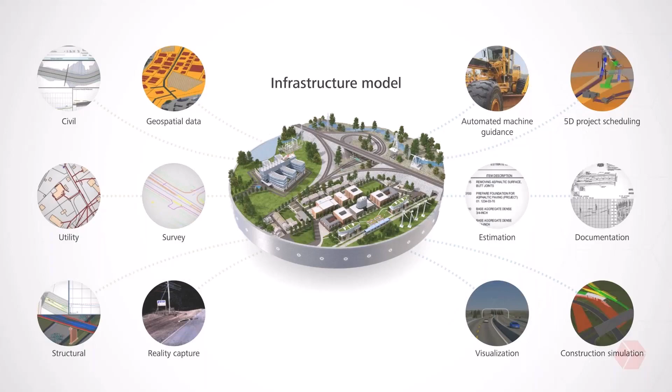So with that in mind, what are the actual advantages of conceptual design? If you didn't catch what I said, I have summarized it very quickly in point form. The biggest one is the reusable design data that you have. You have no silo effect, meaning if you do a conceptual design, you don't have to start again from zero when you reach the detailed engineering phase. You could simply import or link that data and continue your design.

The second one is intelligent design functionality from the get-go. You're going to see a little bit about it shortly, but if you can incorporate GIS, reality capture, cloud computation, watershed analysis, corridor optimization, all of this in a conceptual arena, you can also be much more economical, much more sustainable, and so on.

Parametric design is the way to go. It's dynamic. It's much easier to adjust the dimensions of elements, get the quantification correct, and it's much easier to pick up a mistake, especially if you're working in a 3D environment.

The visuals are really amazing. I mean, you can go up to like 4K, 8K now. You can do a lot of animations, a lot of fly-throughs, and it's really an amazing way to pitch your design and visualize it before it actually is constructed.

The integration is also a very big advantage where you can integrate the operability across different file formats, different technologies, different ways of working, systems. And you can see now the several options. You can do multiple options in one model.

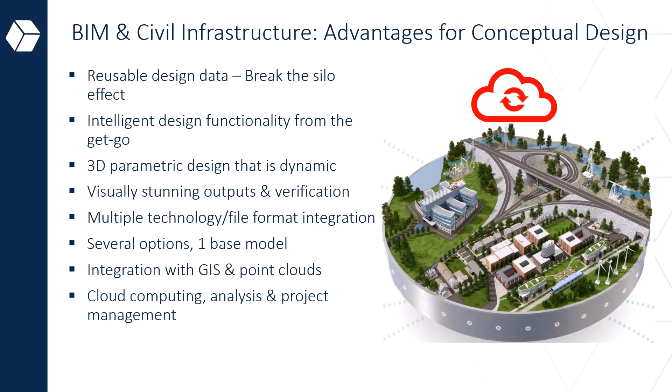And last but not least is definitely cloud computing, the integration of the cloud, the common data environment, the analysis that it gives you. It helps you and affords you with a lot of intelligence and computational analysis softwares.

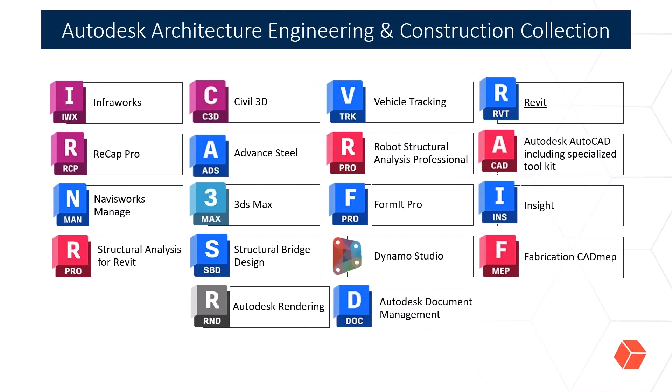So first of all, as you saw in the poll, over 40% don't know what Infraworks is, and maybe more people don't know how it actually fits in. Maybe you're using it on its own, but how does it fit into the grand scheme of things? I'm showing you here, it's part of the Autodesk Architecture, Engineering and Construction collection, so the AEC collection. And you'll see there it is.

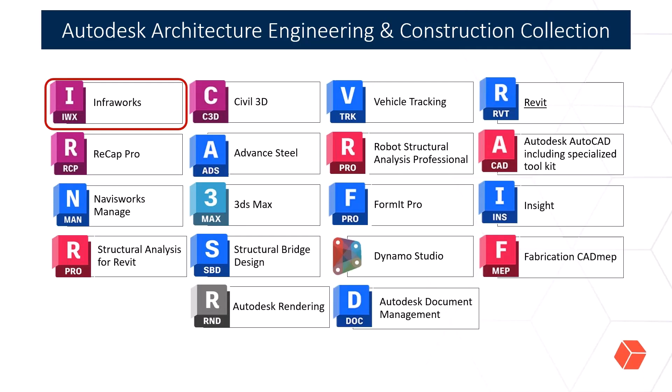Now the advantage with this bundle of software or BIM technologies, you can interlink them and collaborate across them quite seamlessly. And Infraworks fits in with the 2 main softwares, or the hero products in the infrastructure industry, that being Civil 3D and Revit. So how does it work? Right, let's have a look.

So here we have Infraworks. Now Infraworks can link to Civil 3D and Revit quite easily. If you're not familiar, in Civil 3D you have an Infraworks tab, believe it or not. A lot of people, especially when they come for training, have not noticed this. This has been out there for years, and you can actually import and launch Infraworks directly from Civil 3D. Of course, you will have to have it installed on your computer.

And then, of course, you've got Revit. Where does Revit fall in? From the civil structures workflow, if you're dealing with bridges and tunnels, or if you have any architectural designs, you can actually coordinate it between Civil 3D and Revit and get the positioning correct on Infraworks. So you can actually see the visual model between the 2.

Now, what about the rest of the AEC collection? I've just highlighted the main ones, but those are all of the BIM technologies that you can actually bring in to Infraworks. So Recap Pro from a point cloud perspective, RCP files, Navisworks, NWD files. Advance Steel is AutoCAD based, AutoCAD products, no problem. 3ds Max, FBX files, FormIt Pro.

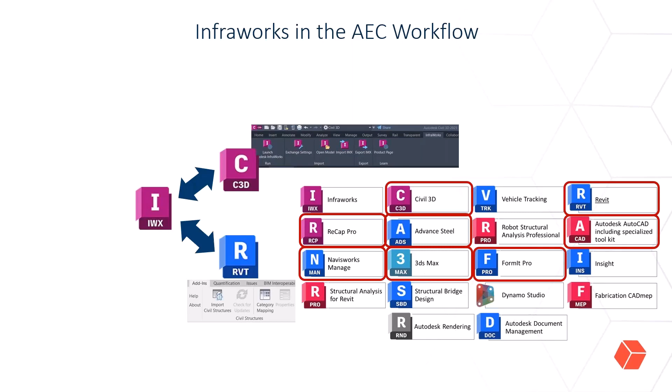Now, where do these technologies go? Pretty easy. If you open up Infraworks and you go to data sources, these are all of the file integrations that you can bring in. You can see it's quite a long list.

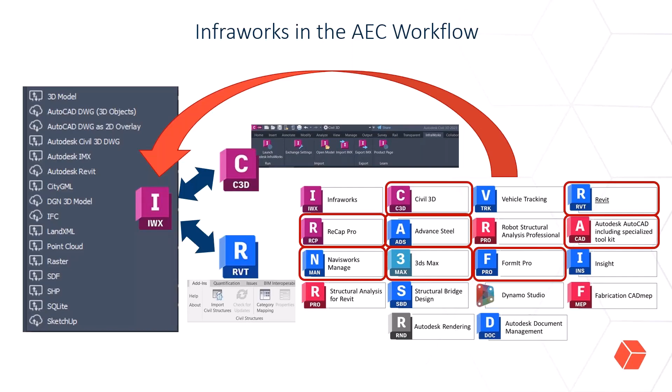SketchUp users, if you have really cool 3D models that you don't want to duplicate, you can bring in SketchUp files. SQLite, if you're working on SQL, depending on what data you have, you can bring that in. Land XML, raster, IFC, which is in line with the open BIM standards that's currently happening in industry, and so on. Okay, so now that you know where it fits in, let's get started with our showcase for today.

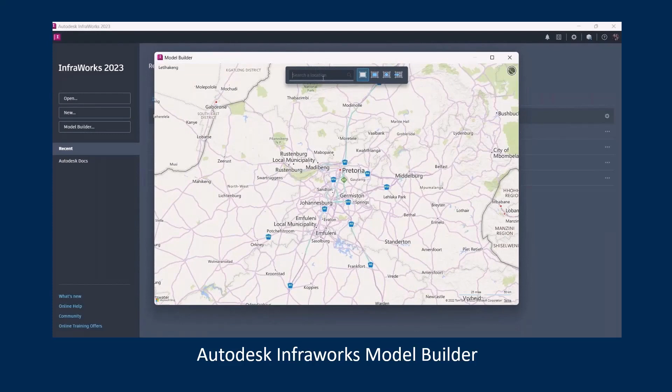But I know most users don't start on the cloud. So what we're going to do is work locally. And we're going to make use of the amazing feature called Model Builder in Infraworks. Now, when you do open it, it will probably pick up your location. Sometimes it might show America. So you can just type in the address that you want to work in. In this case, I'm using the Hartbeespoort Dam.

I have used this in quite a lot of my previous webinars because it's a really cool data set to actually demonstrate the point, and you can actually go and create your own, as you can see here. Now, it does have a cap on the model size, 200 square kilometers, which is quite a huge model. And of course, if you exceed it, it will give you a heads up.

So let's say I am quite happy with this extent of my model. I can now go and assign a coordinate system. Now, if you do get stuck, you can always click the help button, and it explains how you could go assign a coordinate system. By default, it is set to LL84, but we're going to change it to the South African coordinate system. So whichever country the project is in, you can go and select it from this list.

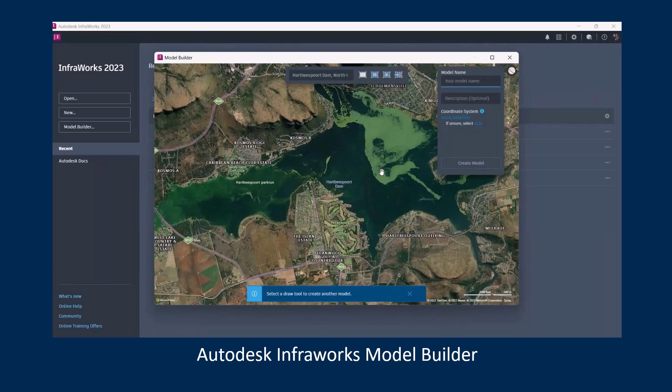In this case, it is based in South Africa, and we've got the Hartebeesthoek94 coordinate system, which is the current one, and it falls under LO27. And then we simply click Create Model, and the cloud does the rest. Now, this is the amazing cloud functionality that's part of BIM Technologies. So it will start processing it. Sometimes it might take a few minutes, depending on the size of the area and the infrastructure that it picks up.

This one probably took me about 6 minutes, and it'll give you a heads up. You'll receive an email to say your model's done, go and check it out. And you can see now when we come here, there it is. So it's called BIM for Smart Infrastructure. I'm given the option to work on the cloud or locally, and I'm going to select local. But I'm going to show you, once you work on your desktop or laptop, you can sync it to the cloud after that. So it's not a problem if you start locally.

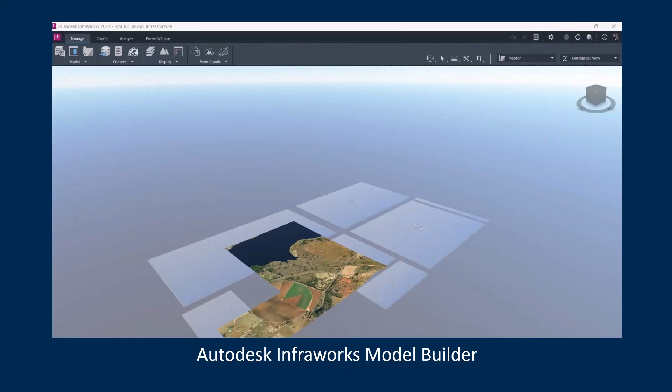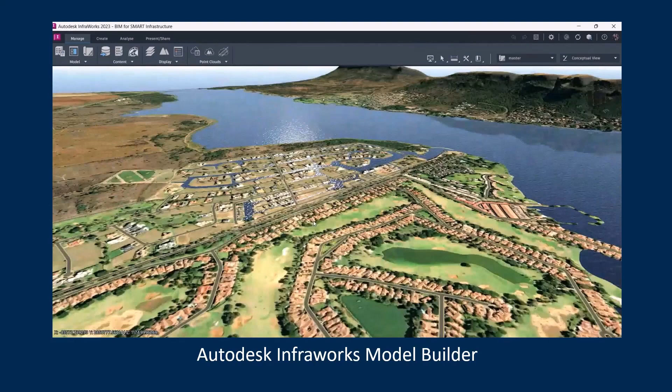So now it will start opening your model. Again, it can take a few minutes. This one took a few seconds. You might see these tiles appear, loading the extent of the aerial imagery and the data that it picks up on the web. And this is the result. You can see we've got a pretty decent sized model here. That is actually quite a big model, and it was done with, I would say, zero human intervention. All you have to do is specify the location and the coordinate system. And this is what it brought in.

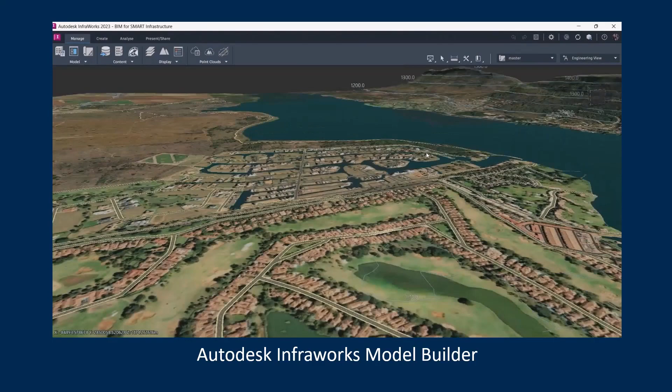As you can see, it brought in placeholders for roads. We call them planning roads. Those are not up to engineering standards, or they might be depending on the survey data that it brought in, but it gives you relative positioning. Now, if we look at the engineering view, it does give you conceptual terrain data. It will search its geospatial engines online and bring in terrain data that you can use to get started on your design, rather than waiting for the surveyor. And the more you zoom in, the more you'll see the contour spacing; it might reduce or increase depending on the level of zoom. And now we have our model and we can get started.

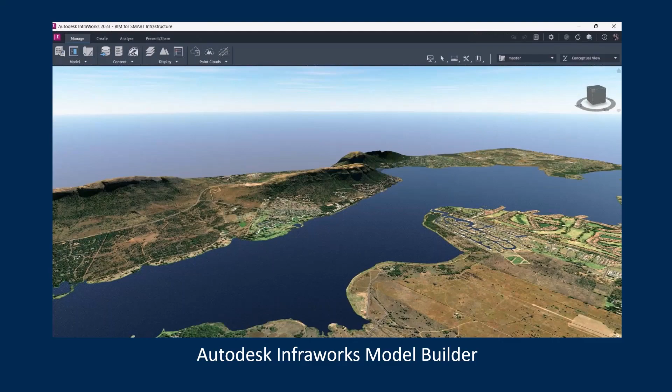Now just imagine how you would probably do this. You would normally go into Google Earth and draw a polyline if you're doing a road, get an elevation, take that snapshot and place it into your feasibility or conceptual report, but you can't use that data. Already, I've got a visual model that's 3D, it has terrain data, relative positioning, and aerial imagery. I'm already way ahead of the curve, and we're still in conceptual design. A lot of consultants, unfortunately, can't even get here during the detailed design phase, and we've got it in a few minutes.

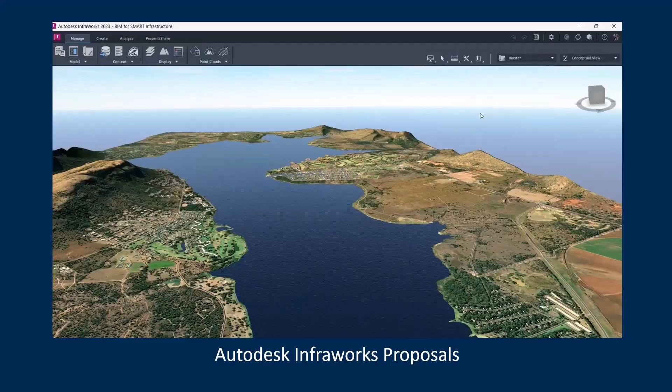So now that we have the model, how do we propose multiple options? Because I don't want to go and create this model again, even though it was quite easy. Can I use the same model to portray different design intents? Yes, we can. So let's have a look. On the top where you can see master, please do not work on that. That is your original base model.

And let's say in this case, we've got a project where we're going to be putting in 2 bridges. One is going to be at this location and one is going to be somewhere else. Now you can see I am adding a proposal. I'm going to call it option 1 for bridge, whatever you want to call it. Remember, there's no spaces in the title box, so you might have to use an underscore or one word. And I'm going to create a bookmark at this location.

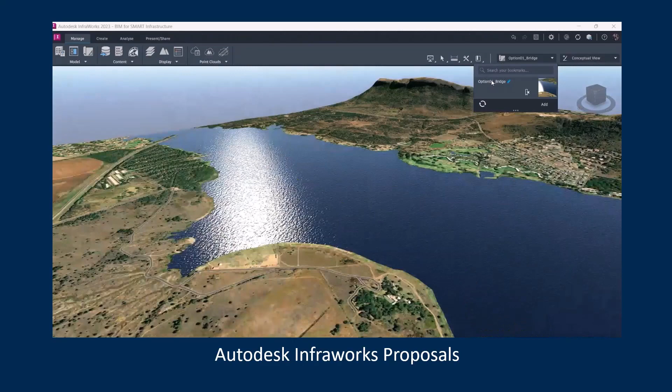So probably we as the engineers are sitting and thinking, okay, do we put a bridge here or do we put it on the other end? Now we can do both of those options in the same model, right? If you make a mistake, you can always delete a bookmark. It's pretty easy. So what is the advantage of a bookmark? Let's say you've got a huge model. If I click on the bookmark, it's going to take me right there, because otherwise you're going to be zooming and panning for a lot of time.

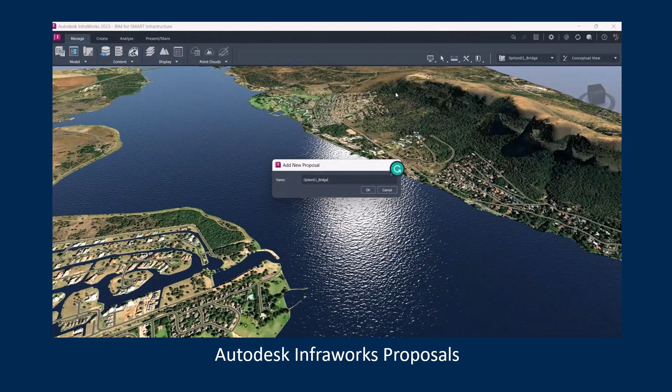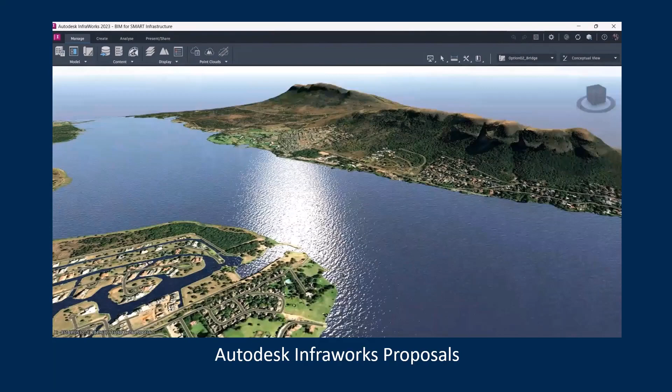Now let's say this location here is going to be for bridge 2. So all I'm going to do is add another proposal. I'm just going to change that to option 2. There we go. Hit OK, and now we are ready to go. So remember, create your proposals as many as you'd like. Do not work in your master model.

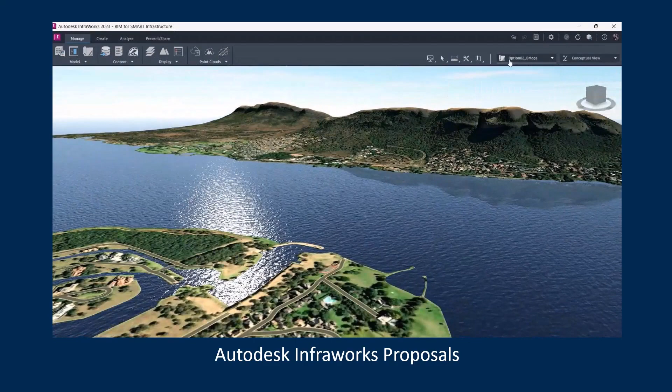I can't stress that enough, because whatever data you create in the master model is carried forward throughout your future proposals. And of course, if you duplicate from option 1, all the data that is in option 1 is going to come through. So here we are, we've got both the locations of our bridge sorted out, and I can add many more as the project goes along. So now we are all set to start with our conceptual design.

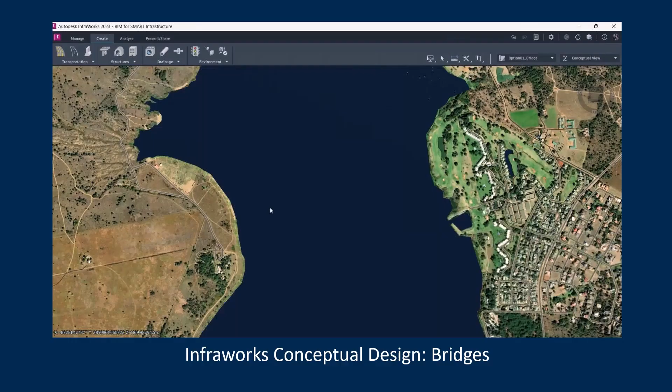If you are using Infraworks, what can you actually create from a civil infrastructure point of view? We can do roads, we can do structures, we can do pipes, we can do a lot more. I'm going to show you how to model roads, structures, and pipes very quickly. So let's start off with roads and bridges. Now, this is normally the complicated one, or is seen as a complicated area. So the first thing is we are in option 1, as you can see on the screen. Okay, so make sure you are in the correct place.

There we are. And let's say we're going to start and we're going to end somewhere there. Now you can have the exact X and Y coordinates. I'm just placing it in here. The pro tip that I would give you is to start off with planning roads. Why planning roads? Especially if you are new, it's much easier to draw. I prefer being in a plan view or on a top view. And there are a lot of built-in styles that we can use to generate the road. As you can see here, we've got quite a long list.

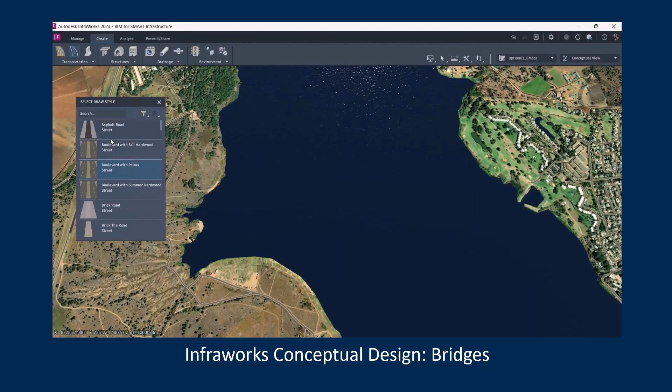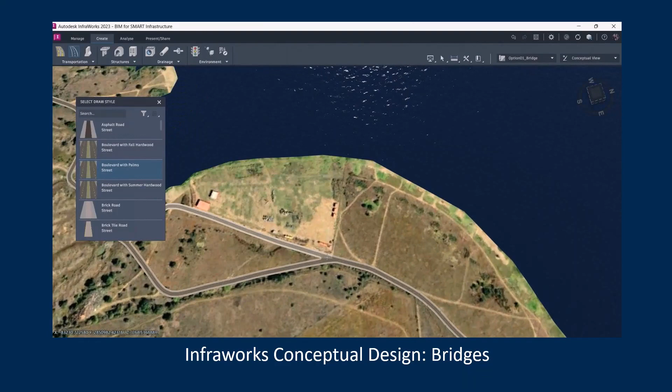Can you create your own custom styles? Of course you can. But the out-of-the-box ones are pretty neat to use, and you can also modify them later if there's a bit of additional stuff in there. So let's say I'm going to use the boulevard with palms street. That's the name of the style. Now all I've got to do is find my starting location. Now, I'm going to do something here intentionally because I've got this quite a bit in the past from users starting with Infraworks. As you can see, I started from that intersection point, that T-junction there.

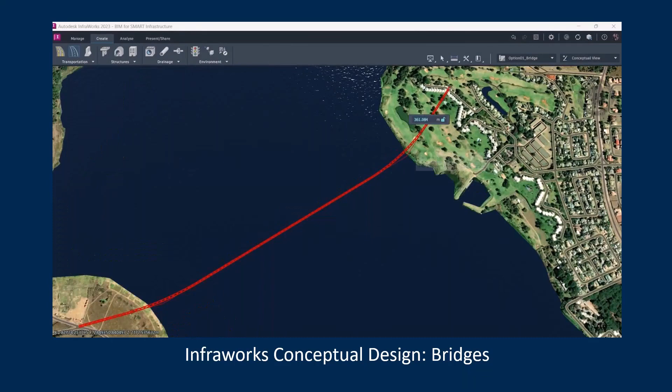And now all I'm going to do is start plotting my road. Now you can see with the planning road, it's much easier to just draft your road. Okay, so I would strongly recommend, if you are starting off, start using the planning roads if you are new with Infraworks. And let's say we are going to end maybe somewhere there. Okay, so we're going to reach the end. And once we do that, it will start processing and update based on the style that we had selected, that being boulevard with palms. And if I close this now, we can go have a look at what was generated.

So as you can see, we've got a 4-lane road. It's split with a median, 2 lanes in either direction. But this is what we normally get. You can see the intersection's not looking great. Please don't design stuff like this. But I'll tell you why that happens.

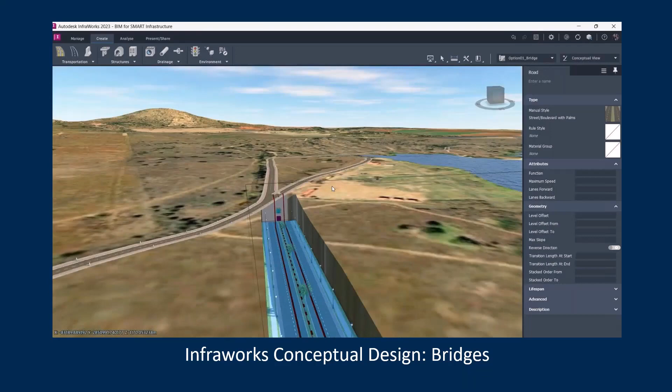So I've done it intentionally. If you look at the lane widths that are coming in from both those roads, they're completely different to what's happening here. And the difference in widths are vast. That's why you're getting something like that.

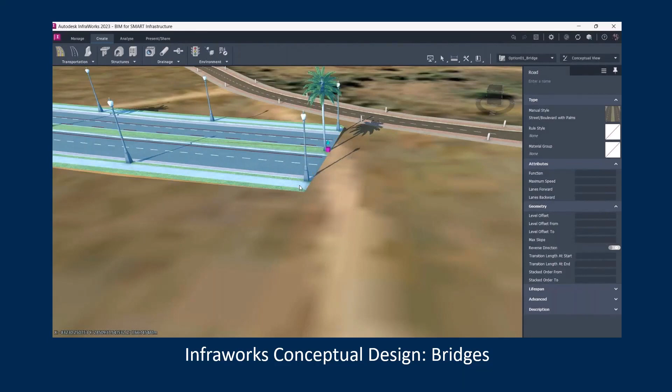Also, if your road sinks in like this, please zoom in because there are 2 grips. The triangular grip is for the elevation and the square grip is for your horizontal placement. A lot of people select the triangular grip and that's why your road falls. Right, so you can see if I adjust that, I can either type in the exact Z elevation or move it. What I'm going to do is I'm going to drape it to the existing natural ground level.

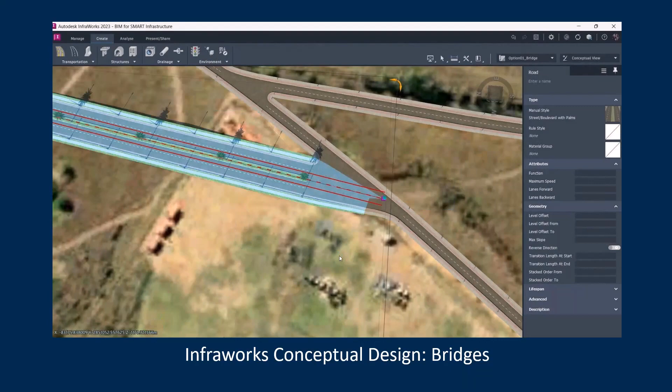Right, so once we have that, how would the intersection look? So if I select the square grip, now Infraworks is so intelligent that as soon as it picks up the 2 alignments are intersecting, it will put in a best guess intersection. Now in this case, the guess wasn't that great, or it actually was, but the lane widths of the corresponding roads are not that great. But you can see if I move it here, it says, okay, now that I've just got a straight to tie in, I can fit it in quite nicely. I can maintain the width of that road and I can fit it in here.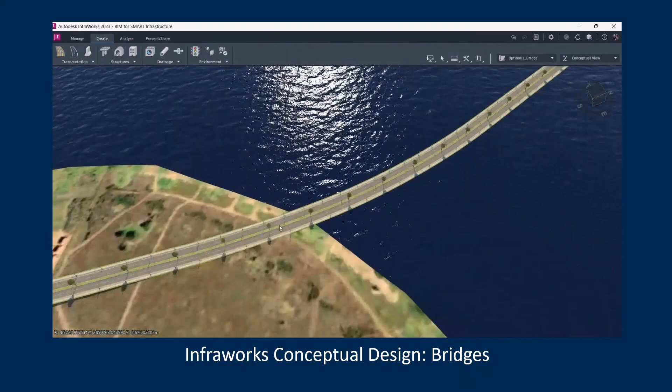Can I modify this? Of course I can. Not yet, because it's currently in the planning stage of a road. So planning roads are very easy. If you're the person who just wants to put together a quick mock-up or a quick type of scenario that you would like to illustrate, planning roads are the easiest to go.

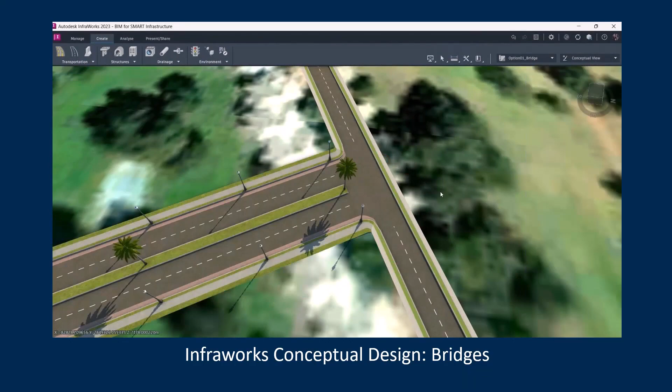And as you can see here, we've got the same story. But this story is different because you can see it's just a straight road, so it should be able to intersect correctly. All you have to do is just move your vertex and we'll play around with it so that it is intersecting correctly, and you can see it update. So now we have our road put into place.

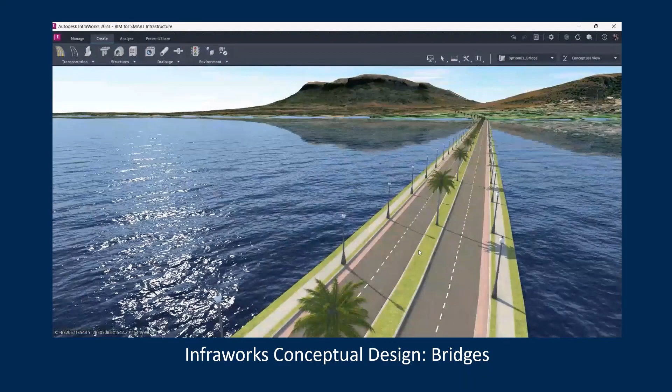You can see we can't really edit anything. We can change it, we can give it a name if we would like, but for now we're just going to leave it as it is, and it is just representing where the road is going to be, and we are now going to convert it to a component road. A component road allows you to edit individual components.

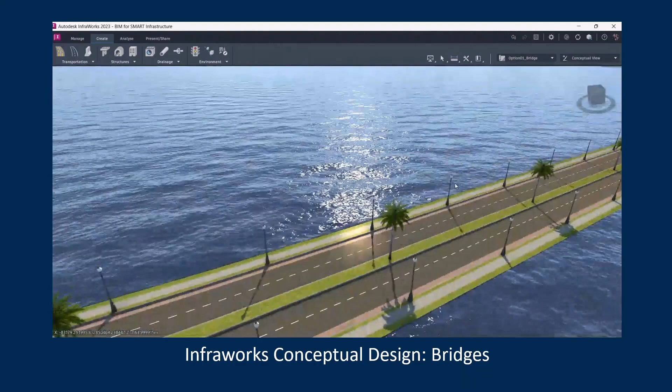So as you can see here, if I now select a lane, I can go and change its attributes, its width, its slope, its depth, and so on, the material, whatever it may be. So that's why we call it component roads, because you can edit components individually. Same with the trees. If I don't want the trees, I could delete them. If I wanted to adjust the spacing for them, I could. So let's say it's 60. You can see it's instant.

And of course, we can go and swap components. There's a huge library, a really nice library in Infraworks that you can make use of. And of course, you can import your own 3D models if you'd like. If you have access to them, you can go and import them, add them to your library, and you can make use of them. I'll just show you very quickly how you can swap things.

So let's say in South Africa, we normally don't have light poles like that. Maybe in the area that you're working, it's not that suitable. We can go and look at what's available in the out-of-the-box library. A great thing with this webinar is I'm using everything that's in your library. I don't have anything customized here. So whatever you're seeing on here, you can do it out of the box on your own computer.

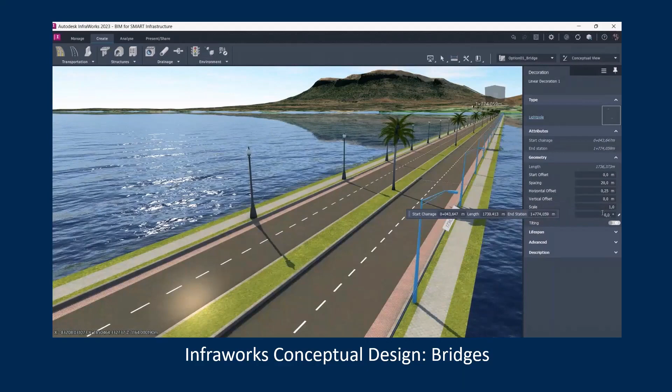So let's say we're going to go and select a light pole, and you can see that's more apt for our environment. If it is facing the wrong way, use the asset card to modify it accordingly. So I will just flip it around, and there we are. And I could go do it on the other side, and good to go. So that's a little bit about the road part.

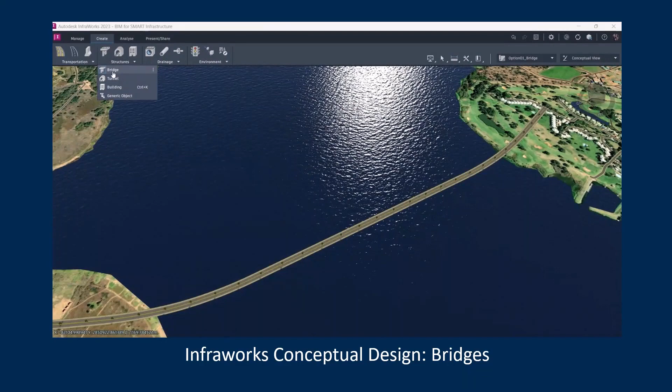So what we've done is we've got it to the component level of things, and now we're going to get a bit more detailed. So now we can insert the bridge. You've got the structure panel in Infraworks. All it's asking us to do now is to select or specify the start and the end of the bridge. You could type in an exact chainage, or you could simply click. Of course, I'm going to simply click here because I'm just demonstrating it to you. And let's say it's going to end maybe somewhere there.

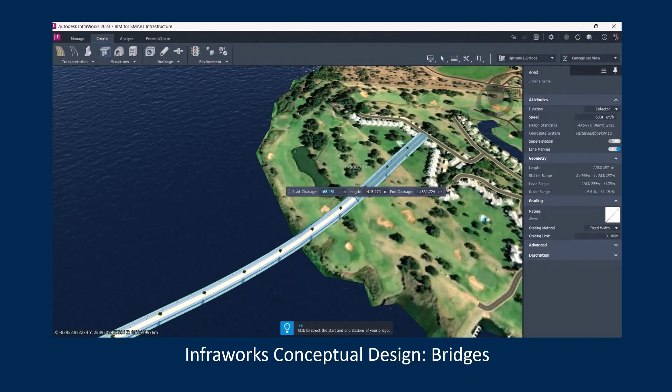Right, it'll take a few seconds to just refresh. As you can see, sometimes you might get this depending on the graphics on your computer or the size of your bridge or how full your disk space is. Sometimes you might just need to move around the model a little bit and select something and it goes back to normal display. And the great thing now is with component roads, I have a vertical alignment or a vertical profile. I can go and adjust this.

So let's say we're not seeing the piers and stuff because it's sitting on the road surface. I could simply play around with the VPIs and it will update. So I can go and raise it. In this example, I'm going to raise it quite a bit so that you can see the bridge quite nicely just for this demonstration. I've also got a yellow tracker to show me exactly where I am on my roadway. Okay, so that also helps.

So you can see the positions of the VPIs relative to where you are tracking on plan or on the top of the screen. And again, I'm just going to raise this so that you can actually notice the elevation of the bridge and also look at the parametric components that you will see shortly. Please do not make roads with 20% grades. But of course, you can go and edit it. Okay, so don't judge me. I'm just using the clicks very quickly just to give you an idea of how you could actually manipulate it to your own advantage. So you can go and type in exact data.

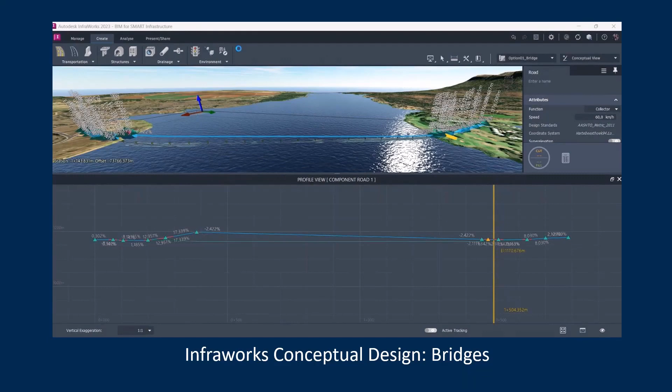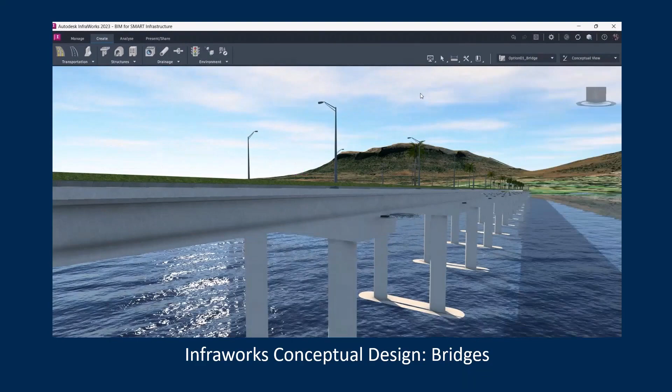But just remember, we're still in the conceptual stage here, and we have all of this, air quotes, detail engineering functionality already. So here we are. Once I hit update, here we go. We've got our bridge, looks beautiful. So if I select any of the components, let's just select maybe here. So this pier is pier 18. I can go and adjust the metadata that's associated to it, the material, and so on. And again, I've got my road.

You can see the start of that elevation. That kink is not great. I've done that intentionally, to show you that you use 3D modeling to confirm your design. If you do make a mistake, you can actually see it quite easily. We've got our bridge in, done and dusted. Now let's look at doing the second bridge.

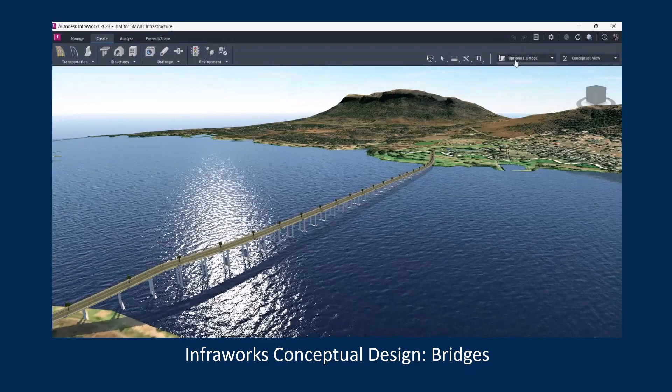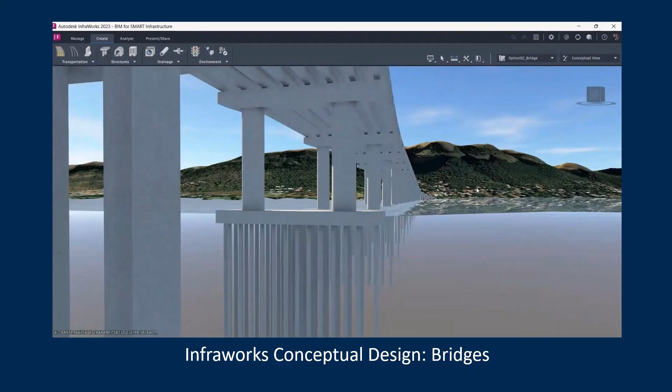So option 2, if I switch on there, it will take me to the location. You can see there's nothing there. And if I switch back to option 1, it's not there. Why? Because it is not part of this proposal. Now you can see in option 2, I already dropped in a bridge. You can see it's got a different design. It's got guardrails. It's got the lighting in the center. It's got the pile caps at the bottom and so on.

So that's what I'm saying. It is the same model. We just got different options. If I switch back to option 1, you will see that option 1 does not have that bridge. You can see I'm in the same location. And if I go back to the option 2 bridge, it is there. Can you combine them over time? Of course you can. But that gives you an idea of how you can segment your design. Okay, so roads and bridges done and dusted. Let's look at intersections and roundabouts very quickly.

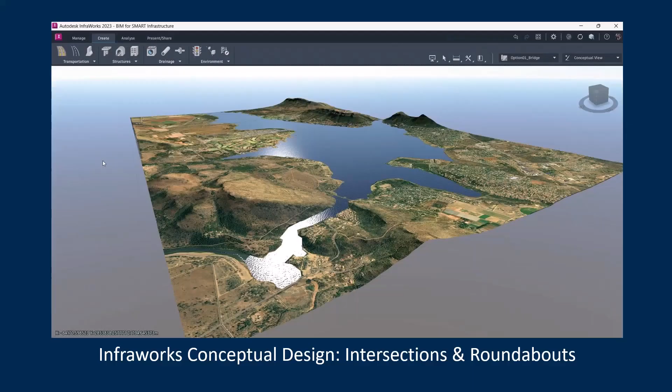So I've just drawn in a few roads. I've actually created a bookmark for it called roads. Here we go. And let's say we're going to go plot in some roads. I'm going to use the planning road type of scenario. You can go and select whatever style you want. I'm just going to keep it kind of uniform. We can simply just go and plot the type of roads. Now I'm just clicking wildly here, just for demonstration purposes. So you can see I've got my straight road done and dusted quite easily.

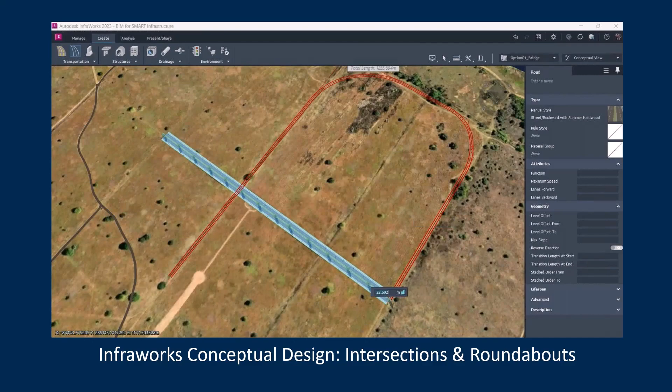And if I had to go and drop in maybe another road, I'm going to go there and I'm going to continue clicking. I'll just maybe use the outline of the existing dirt tracks on here just to give me a bit of a guide. But let's maybe create like a loop going across. This will just give you an idea of how easy this is. So we drop in the road.

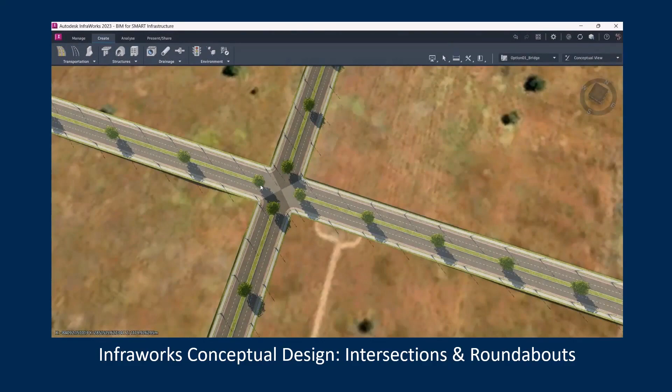Again, you can go and add. You can see the box pops up for you to type in an exact value. And if I close this, let's go see what it did. It actually put a really decent intersection in there, right? So we've got a T intersection and we've got a four-way. I put a four-way in simply because people always say, you don't show a four-way intersection.

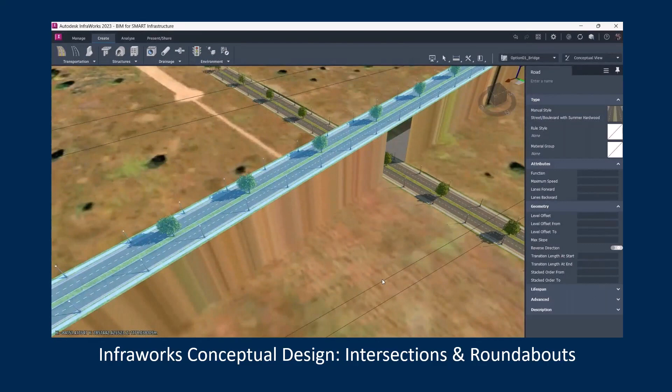I've also got a lot of different gizmos to help me adjust either the elevation or the horizontal placement of this road. You can see it's quite intelligent. And if you're looking at what I did there, you might see this on the road or in the highway that you're driving through where you've got embankment sometimes and a road going under. I'm just going to undo that. You've got a really good option base for you if you are doing geometric design.

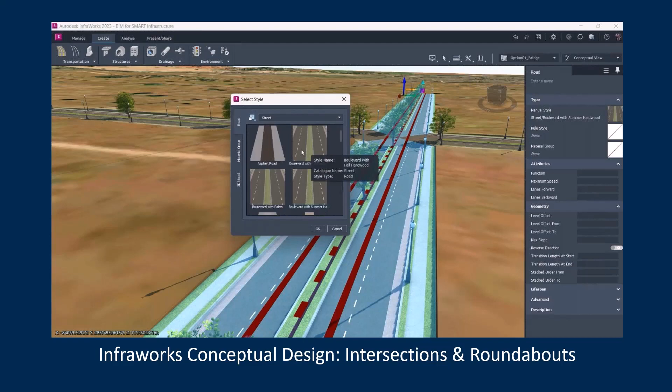So we can go and then change it. Of course, if I don't want the style, just to show you the library, because I didn't show you this previously. Here we are. You've got asphalt, you've got brick, you've got bridge. Like I said, this is just focusing on the basics out of the box. So if I wanted to maybe update this, I could simply go and select either a different road, or I can just leave it as it is.

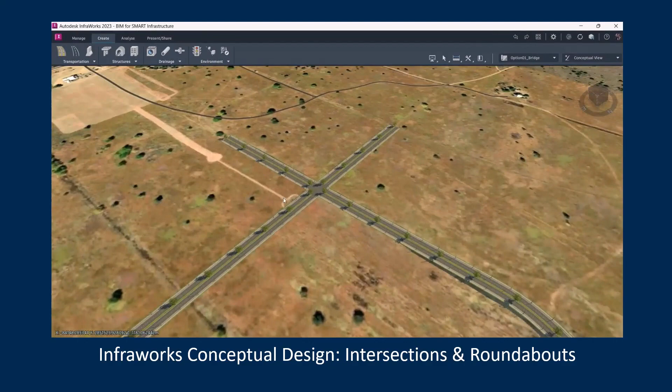I just showed you that if you do change it, you can see it did update, and it updated intelligently because it still maintained that dynamic intersection link with the corridor. So I'm just going to undo that very quickly, and this is what we have. Now, if we wanted to modify the geometric parameters of this, we'll first need to convert this. Currently, it is on a planning road, so I'm going to convert that very quickly. I will have to do it for both the intersecting alignments. You can't do it just for one, because you want full access to modifying that geometry around them.

Right, so once we've done that, you can see it already puts in the line marking. We can go and adjust that as well. Now, when you select the intersection, you can actually specify the design vehicle. So let's say I'm going with maybe that truck there or that trailer there. You will see that the radii adjust to accommodate that truck, right? So it's based on AASHTO standards. I can also use my own discretion and use the grips like CAD to update certain portions of the intersection if I would like. Same with the line marking, I can go and edit the attributes for the junctions or for the bell mouths.

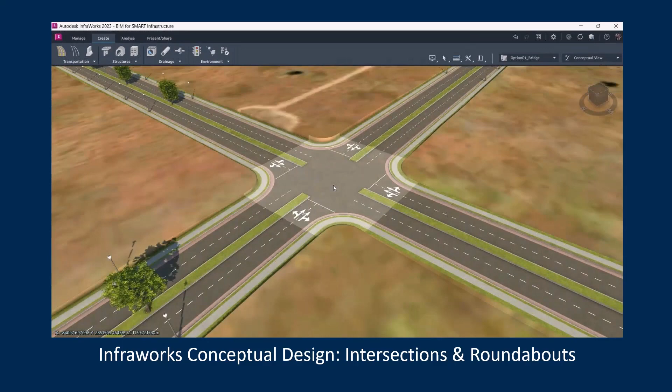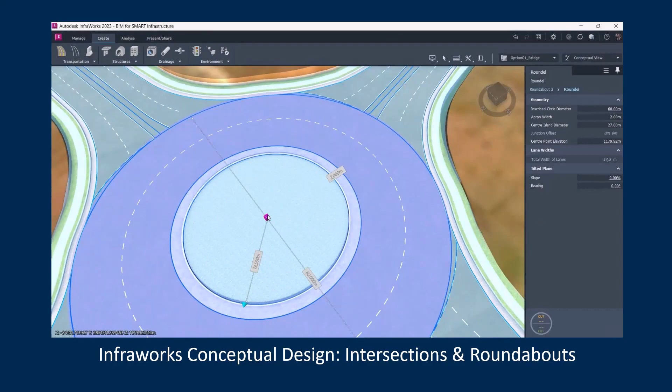Right, so you've got this here. If I wanted to change this to roundabout just to see what it would look like, I could simply step it up to a roundabout to see what it will give me. That's quite oversized depending on your land constraints, how much you have available. But we can go and adjust this if we'd like, or we could change the type of roundabout standard that we are using, and it will adjust accordingly. So if you are a CAD person and you like using the grips, more than welcome to do that. If you are more on the automated side of things, you can use the standard.

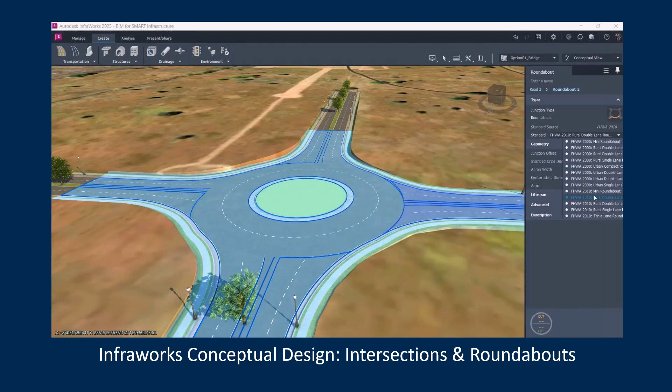So here currently we got the FHWA, the Federal Highways Design Criteria, or what you could do is use it as a base here, take it into Civil 3D, and then get it to whatever standard you'd like. You can see it's not going to work all the time. That looks terrible. So please use your engineering discretion here and use something suitable. Right, so that is a quick preview of intersections and roundabouts.

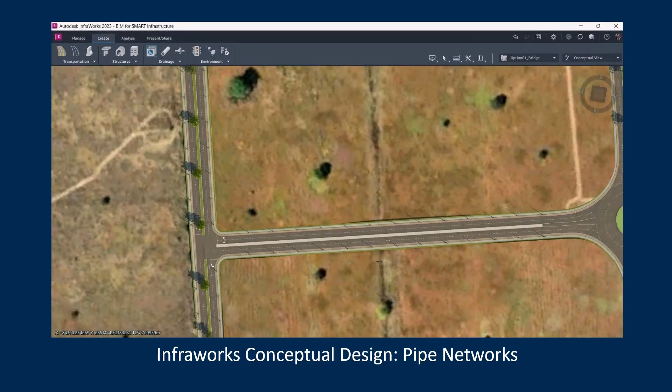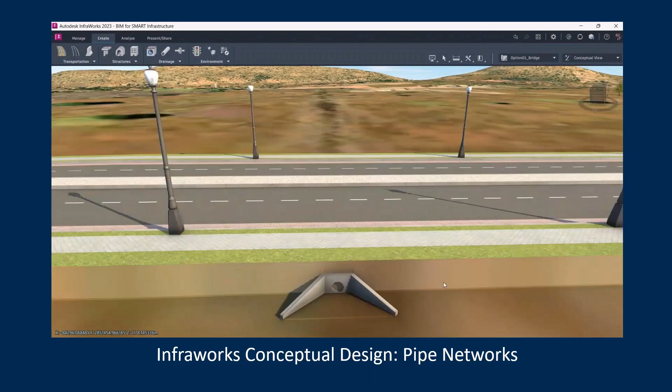Now, what about pipe networks, right? We've got a lot of options here. We've got culverts. Culverts are pretty neat. I'm going to do this very quickly. Let's say we've got a culvert going across here. Again, you don't have to be 100% exact when you're in concept stage, but the more precise you are, the better, right? And here we are. We've got the head wall with the culvert going through it.

Can we see it because it's going below ground? Of course we can. We can simply switch the view. Engineering view highlights the infrastructure, and as you can see, it is below ground, and I've got my culvert running there with the head walls and the wing walls over here.

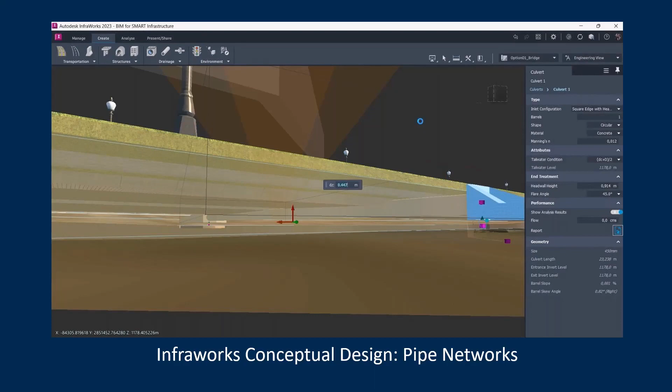I can go and adjust this based on the skew angle, on the height, on the elevation, where there is, of course, a slight slope, depending on which way it's draining to. And yeah, you can go and adjust this however you would like to get it much more accurate. You can also change the catalog that's based in the out-of-the-box library. You can go adjust the quantification, whether it's circular, whether it's box. There's so many options that you have at your disposal.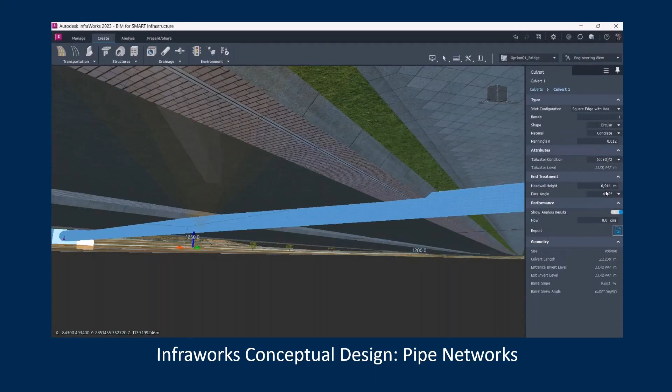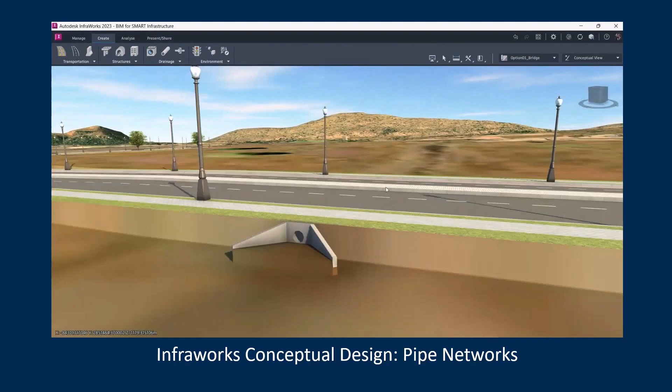Does that mean if you do a pipe network, you can go below ground and have a look at it? Absolutely, you definitely can. You can see even the Manning's coefficient is there for hydraulic analysis if you would like to take it further. And this is how it looks visually. So this is below ground. We can go and have a look at our data and make use of it accordingly. So yeah, that is a quick one on the culverts.

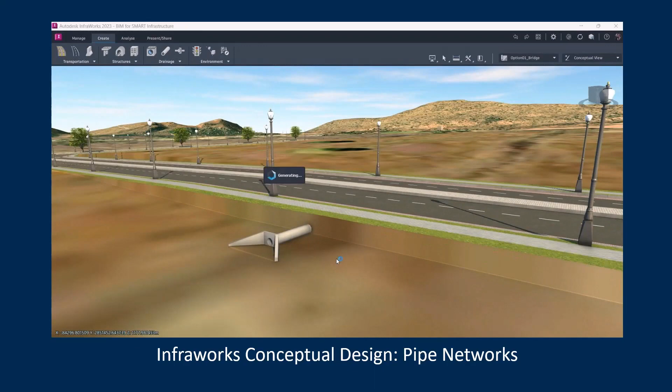Of course, I can extend it, I can edit it as I would like, just to show you very quickly. You can see because it's parametric, everything moves along with it. Now, if you had to do this in AutoCAD or something that's static, you would have to make sure that you selected every single component and then moved it. So that's a quick one on the actual culvert.

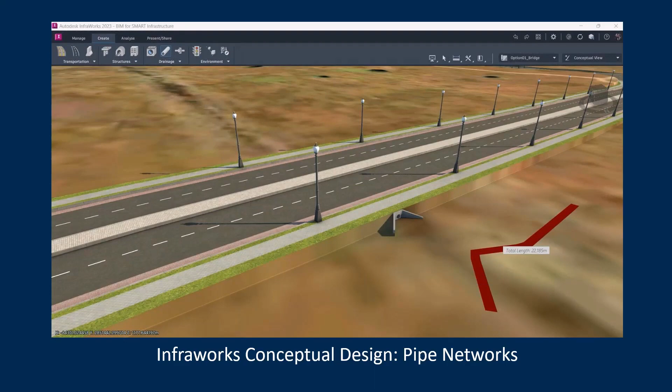What about normal pipelines? This one I'm not going to spend too much time on. You can simply go and plot that in like you would do in CAD. So you simply go and click wherever you'd like. I'm just going to drop it in here very quickly, and you'll see that it draws in the pipeline. Can you join adjacent branches or branches that are linking to the main outfall or wherever it may be? Yes, you can. So again, you can go and drop this below ground. Again, I'm doing this very quickly.

If I had to add another pipe here, maybe that's feeding into that pipe to the outfall, you'll see that it automatically links it quite nicely. So yeah, if you want to do a quick pipe layout for conceptual visualization or representation, you can go and use this on here. You can add in connectors. I don't see a lot of people adding this in for conceptual design, and I can probably guess why. But you can go and add it.

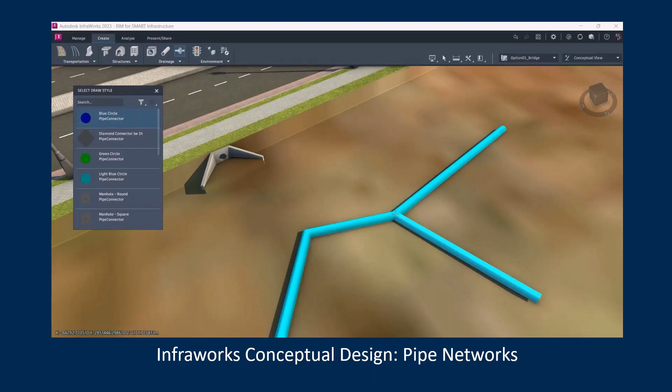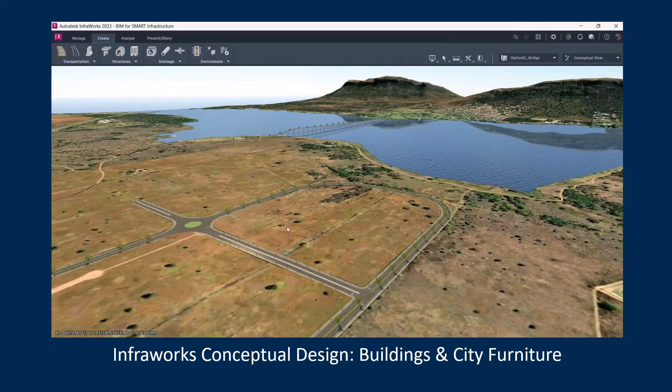What it does is it shows spheres at the points where the connectors will need to be. So that's why you've got like a blue circle, green circle, and so on. And then you can go and click at the point and it will normally insert. Okay, we're almost at the home stretch. Buildings and city furniture. So if you want to add additional parametric objects or placeholders to your model, you are more than welcome to. And we call that city furniture in InfraWorks. Okay, so it's under the Environment tab. You have a ton of things that you can actually add.

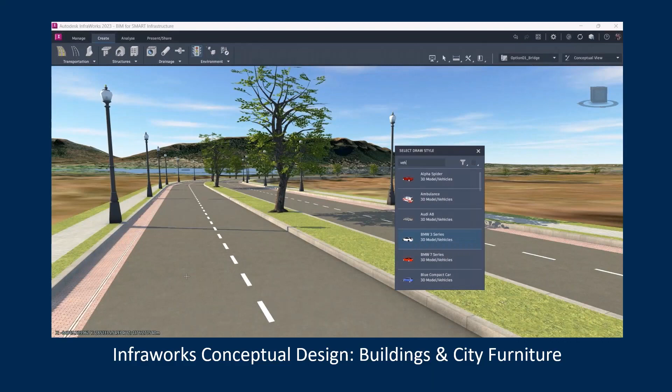Now, city furniture is a big library of 3D objects that you can use, whether it be from landscape architecture, construction, residential, architectural, civil, visualization. There's so many objects on here. I can't give you a full list of it because it's quite a lot. But you can go and simply type in or search to see if there's something that you're looking for. So let's say I wanted to insert a car on this road. Maybe I want to take a really cool photo, use it in a report for presentation. I can go and simply select whichever car I would like.

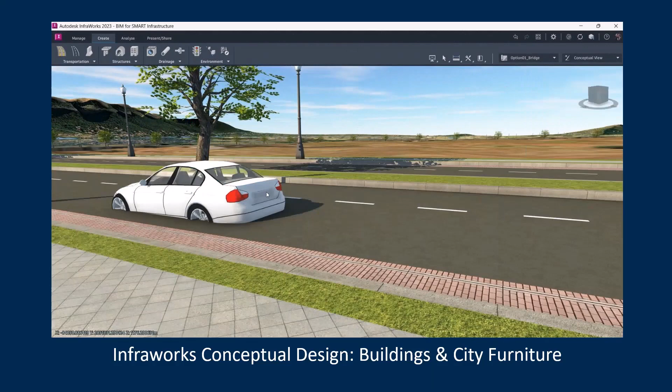Again, if you have more, you can download them or add them to the library. And I'm going to insert that car. I could type in an exact angle or use the CAD grips, up to me. And here we are. You could simply adjust it. You can make it bigger or keep the scale and just adjust the vertical profile. So I can just raise this so that it looks pretty decent for the photo, and that's pretty cool for visualization. And then of course we can go create a snapshot of this.

We can angle our camera however we would like it to be, and we can go and take a snapshot. So you can go and take your photos from there. Right, so it looks pretty decent, I would say. If I wanted to add, let's say, other objects, maybe a building. Let's say you're the architect or your landscape architect, and you know that there's going to be a structure that's going to be going somewhere here. I could just add a placeholder. A placeholder can be any type of building with a facade.

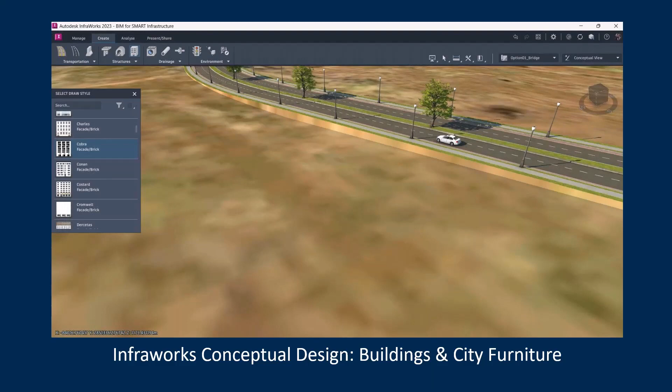So when you are presenting, you can say, hey, listen, based on the development, there's going to be this structure. It's roughly shaped like this. We don't have the architectural design yet. It's still in concept or brainstorming phase, but it's going to be positioned here. And we can then simply go and drop it in.

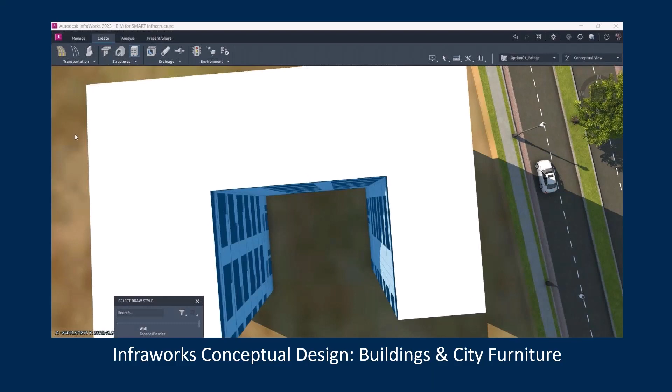This works for a lot of different things. I'm just using the built environment as an example because that's normally, if you're doing urban development or a residential estate or something like that, or government building, you need a layout like this. And then of course you can go and tap in your services, utilities, and so on. So yeah, very easy to use, and you can really have a lot of fun with this.

The great thing with the facade, it is parametric. So if I drop it or raise it, it will scale it accordingly, as you can see there. Additional functionalities, very quickly, you have a lot of different things that you can go and test drive in Infraworks, especially with the 2023.1 updates. There's some really cool features that they've added.

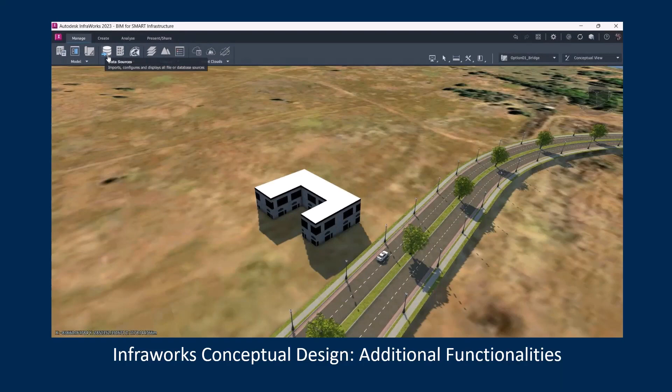There's also analysis that can be carried out from a profile, corridor, traffic, structural, as well as drainage you've already seen. Watershed also is pretty cool, and you can also create rainfall. And of course, you can go in, either export your model, create videos, take snapshots, and so on. And remember, you have access to a lot of different file formats that you can import into Infraworks.

Right, last but not least, incorporating the Autodesk Construction Cloud. So now we've got our design. Remember, we started it out on the desktop or your computer, wherever it is locally. How do we get it to the cloud? So first thing is you need to set up the project on your Autodesk Docs. Now, if you have AEC collection, you already have Autodesk Docs. You don't need to purchase it. It is included in the collection.

So you can go simply in there, log in with your profile, create a project. You can see I'm giving it BIM for Smart Infrastructure, keeping it simple, put in your project number, whatever it might be. And then you can go and link it to whichever account. So if you're part of multiple hubs, you'll be able to see that there. And then of course you can go select what type of project type. You can create your own custom ones. We created one called demonstration project.

You can type in an address. If it's a very popular space, it might pick it up. Go and use enter address manually. Select whatever country you're in, and then add your project data. You're going to see why in a bit, right? You can add in the address, fill in everything right now. You can even put in the start date of your project, end date, and so on. And of course, the estimated project value, and create project.

That's it. You can add the people or your team to your project if you'd like. In this case, it's just me for now. I would access my Docs subscription, and we are good to go. We can then go and create a folder structure if we'd like. We can go and add members. We can put in permissions for the Autodesk Construction Cloud. I mean, it goes on and on.

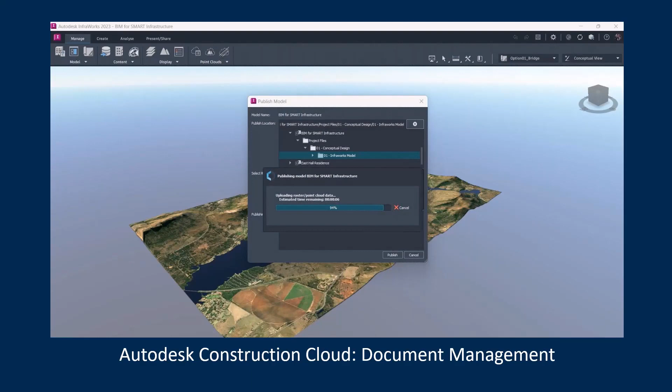And once it is done, if we go and look now, it will tell you, okay, cool, it was successful. And believe it or not, this model now that you're viewing is actually cloud-based. How do we know that? If I go to Infraworks now, you can see it is switched to a cloud icon. So now it is on the Autodesk Construction Cloud for document management. So this is the dashboard. Once I log into Autodesk Docs, this is why I say it's cool to add in the address, because it will give you the weather data on the Autodesk Construction Cloud.

All right, so in closing, we did cover quite a bit in quite a short time. Today's key takeaways are this. You can already see how versatile Infraworks is in the AEC workflows, how easy it is to create a 3D site model in a few minutes, that's visual, has aerial imagery and relative positioning of surrounding infrastructure, how we can create multiple design options using one model. We demonstrated that by using the two bridges at two different locations.

We can also add in engineering components such as roads, structures, and pipes, as well as placeholders and other objects that we would like. By the way, you can even add animated objects. And last but not least, you can take your projects to a common data environment that is synced to the cloud. And the great thing with that is someone doesn't need to have the software to view the model. So they could simply open up Google, log into the Autodesk Construction Cloud, the document management, click open, whether it's on their phone, PC, or laptop, they would be able to view your model in 3D as you would see it in Infraworks, and they could create comments or markups or whatever it may be.